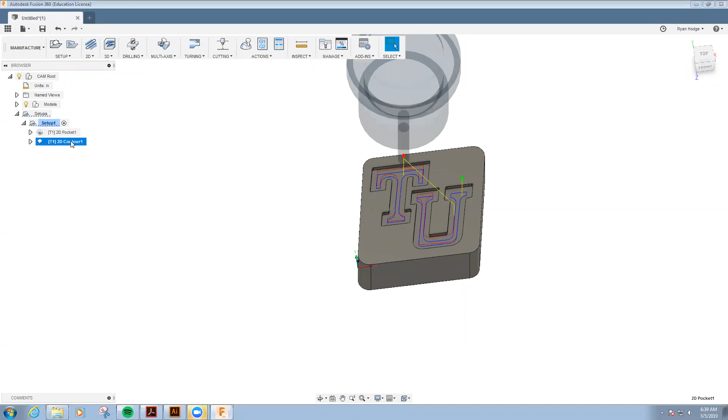In this series of videos, I will be drawing a simple shape and applying a pocket toolpath, followed by a contour toolpath for the CNC router to cut out.

To start with, I will go to Adobe Illustrator, zoom in with Z on the keyboard, and grab this TU symbol that I've downloaded from the Trinity University website.

Control C, I'm going to drop it into a new file, and it can be pretty much any size. Control V. I'm going to update the stroke, and I will use the same values for vectors as we've been using for the Zing laser, and turn off the fill.

Move it up here. I'm thinking this shape should be around 3 inches, so I'll incorporate that now. I've used the linking tab so that when I update the width, the height scales as well.

So now I want to export this as an SVG. I'm going to drop it into my downloads file, and I will save this as TU.

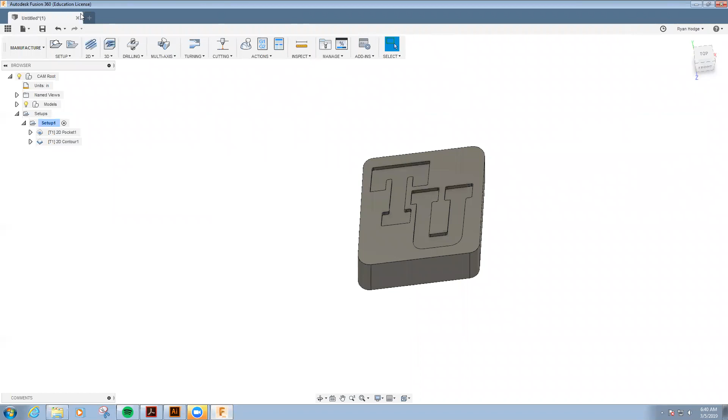And I will navigate to Fusion now. I'm going to start a new tab. I'm going to initiate a sketch on the top plane.

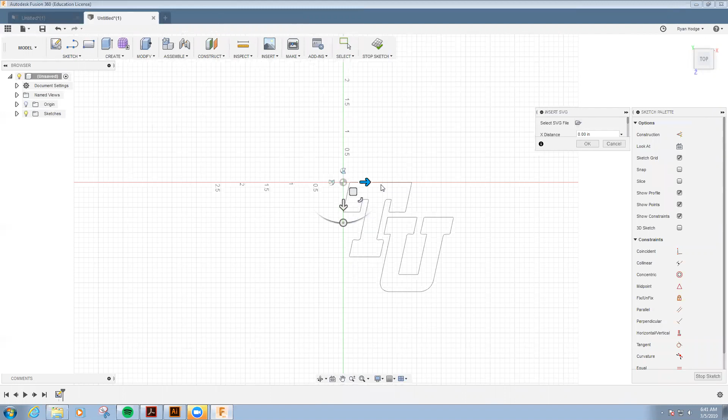Now I can import using this insert tab here, that saved SVG. I click on the file, and I select my TU SVG, and it looks like a good spot. Say OK. Now I just need to draw a perimeter.

I kind of want it to mimic these straight lines here. So I'll make these guys parallel to each other, these parallel to each other, and I'll bring it in a little bit closer.

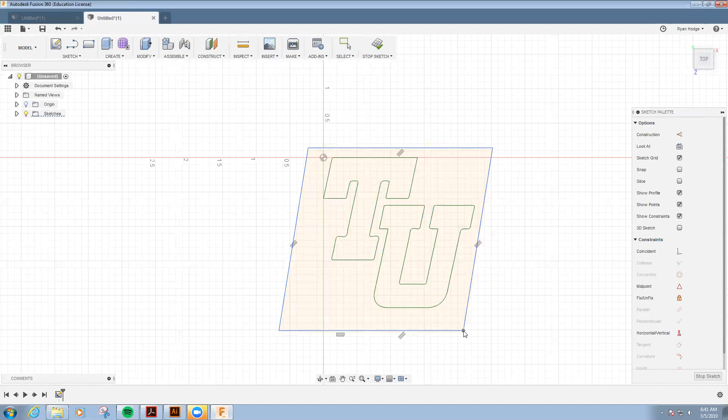I'm not too concerned with it being perfect. It's just a quick representation of the profile. I'll go ahead and stop the sketch.

Now I'm going to extrude, E on the keyboard. I'll extrude everything up into a block. Now the material I have is hard foam or soft foam, and it's 1 inch thick.

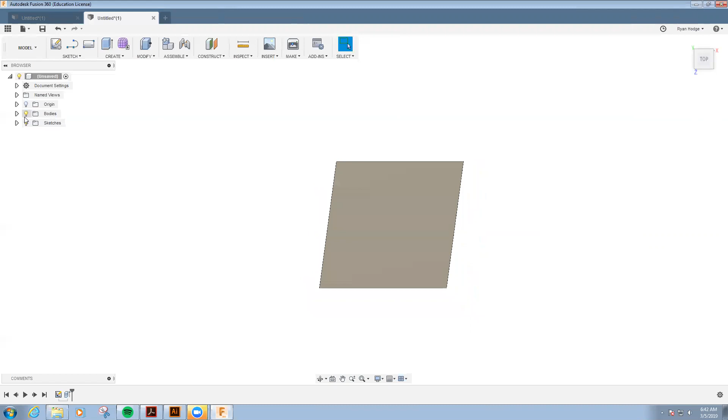So I'll go ahead and make it the full thickness. Now I'll hide the body, show the sketch, and I'll do another extrude. I want to start from the top of the object, so I'll show my body again.

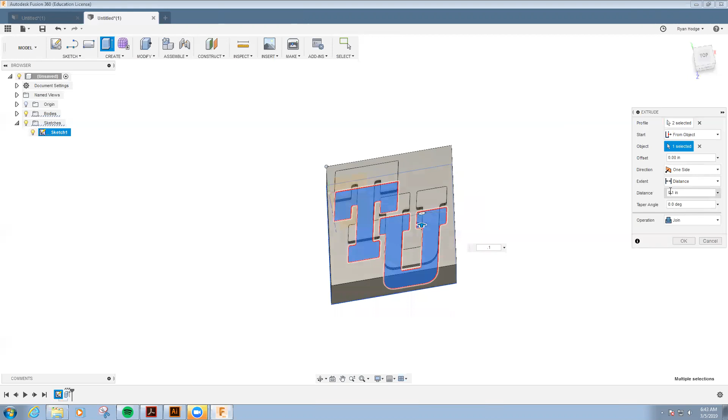I will select the top vector, and I'll drop in about 1/8 of an inch, 0.1. Actually I want it to be -0.1, since I want to cut into the material.

Now take a look. Looks pretty good. Now I'll add a fillet to the perimeter, F on the keyboard, and I will select the 4 corners.

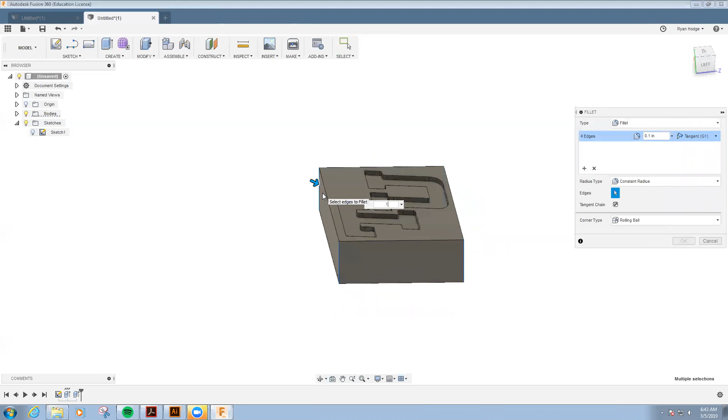And I think a 0.1 fillet will work pretty good. Okay, take another look at it. So right now is a good time to save.

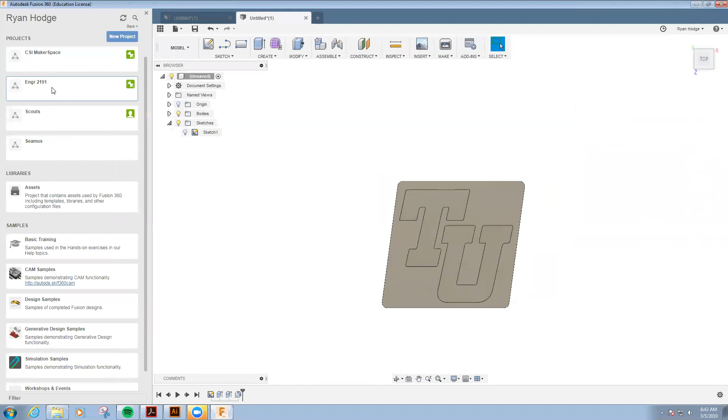I've created an Engineering 2191 folder, a new project folder, and for these CNC projects I'm going to have the class store your projects in this folder. So I've navigated into the 2191 folder.

I'm going to go ahead and create my personal folder. The reason we're having you all put the programs in this folder is so I can go back and double check your CAM settings prior to running them on the CNC.

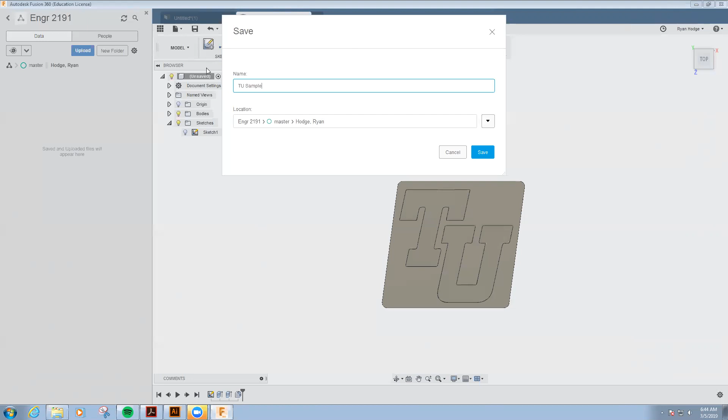So I will save this as TU sample. Double check that I'm in the correct folder, and save. On the next video, we'll do a setup in CAM and apply a toolpath.